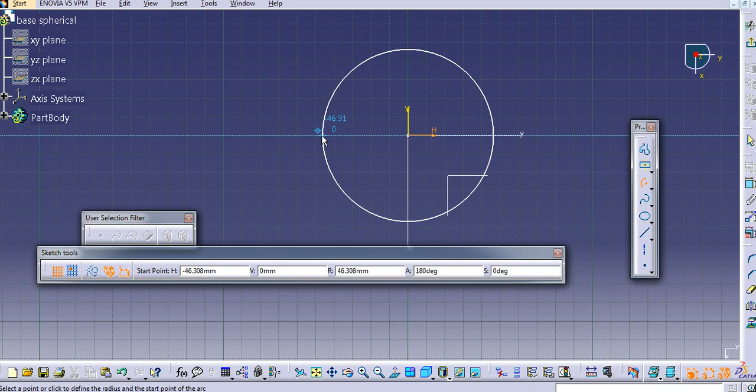For the sphere, we will create an arc here. Select a center point, then select this point and this point. We give the dimension for this, let's say it is 100 mm.

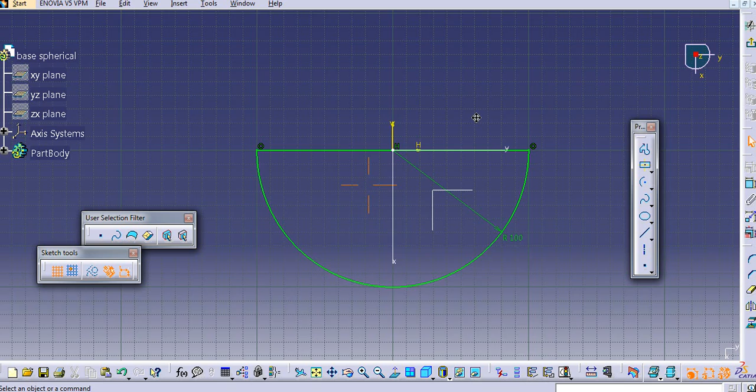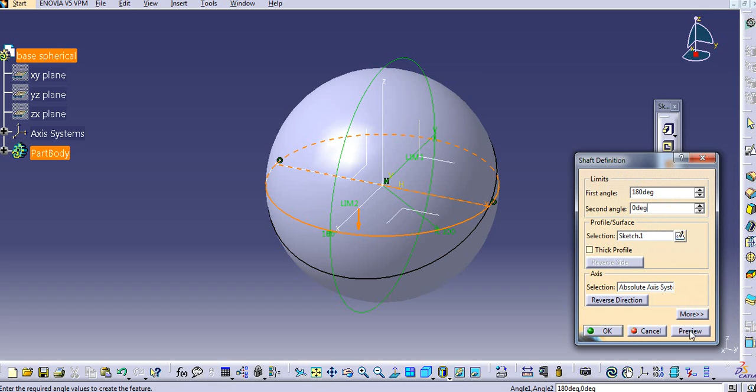Just create this line. Now we exit this and select the shaft command, select the profile and select the axis. I will select this axis for revolution and click preview. Now I'm getting this whole sphere here. I will provide 180 degrees for this, see the preview, and click OK.

So I want a half sphere here, a hemisphere. Again I will add a circular, that is a spherical pocket here, so I need to groove this.

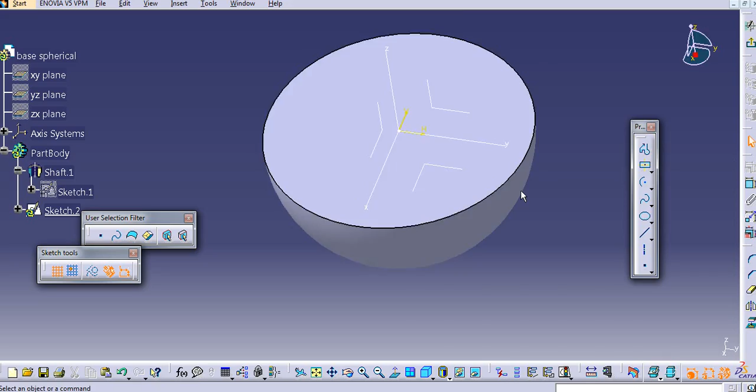I will sketch on this top face and again create an arc here. Select this edge and then select this edge, and provide a radius here.

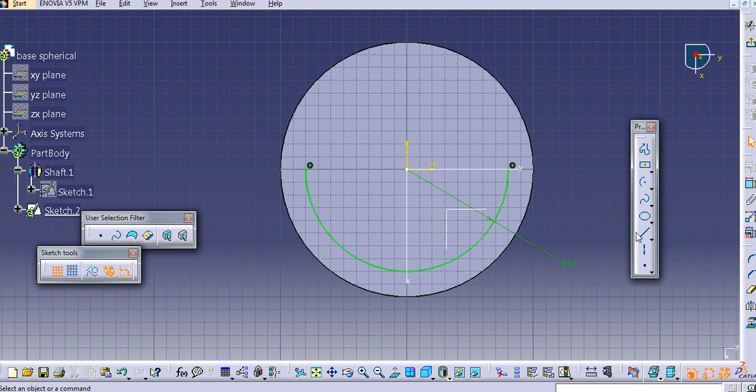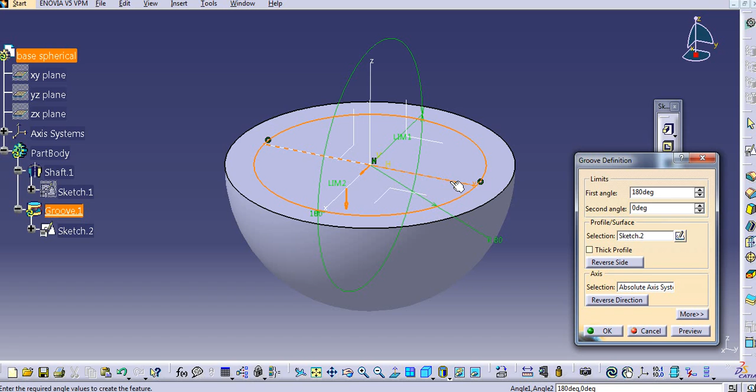Let's say it is 80 mm. Again create a line. Now exit the workbench and select the groove here. Again select the profile and select the axis, select this axis, and then click OK.

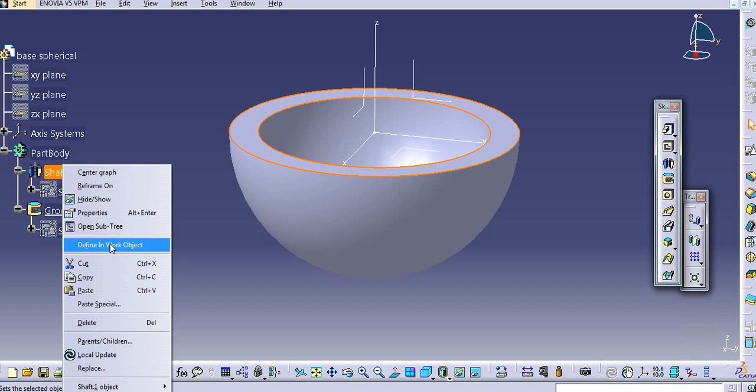So now our part is ready. I will add some other feature here. Before adding this groove, I will add a feature. Just right click on this shaft, define in work object, and add one more feature on this face.

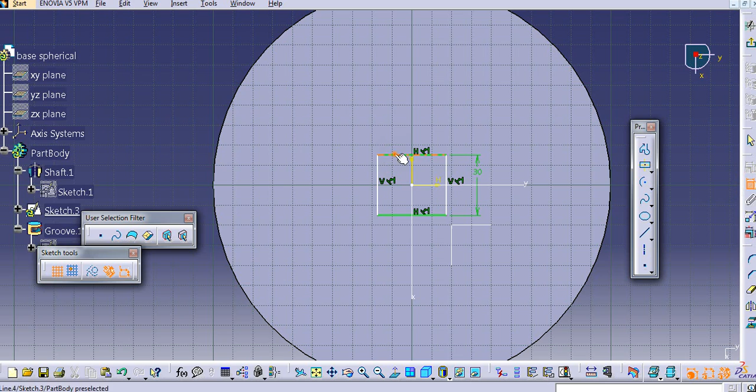So just add a rectangular feature. Let's say it is 30 mm. Just give a distance here, let's say again it is 30 mm.

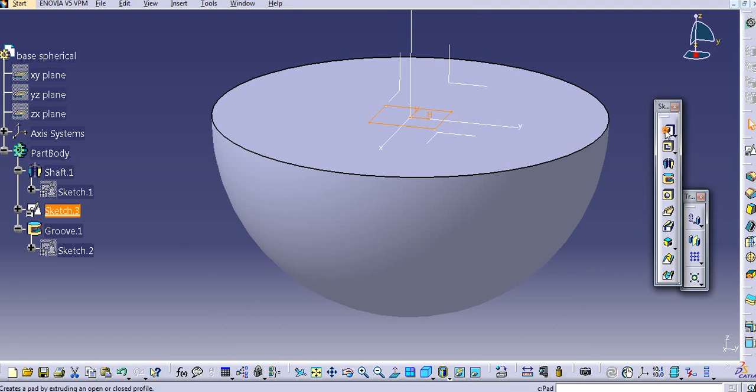Now exit the workbench, and I will add material in the reverse direction, add an approximate distance here, and then click OK. Now I will select the other, Define In Work Object, and in this way our part 1, the base spherical, is created. Now I will save this.

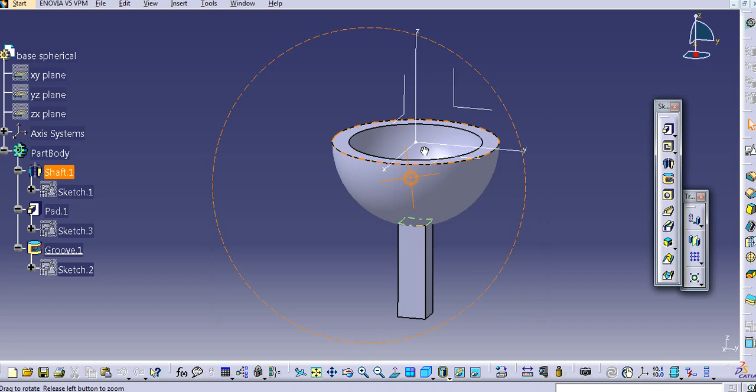I will create one more folder here, that is spherical joint, and then save this part. Now we will create another part here, starting again with part design.

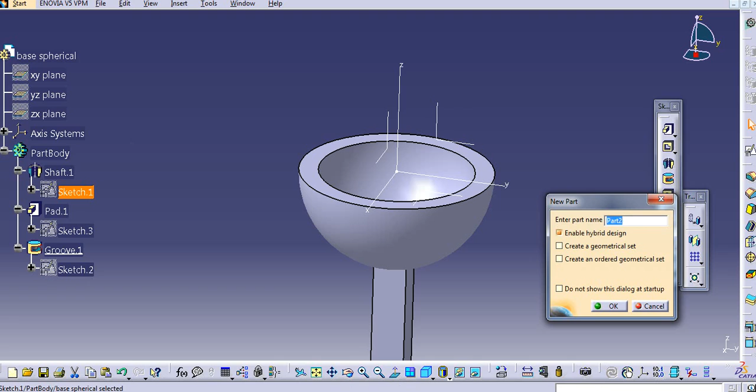Now we will create the upper part. Let's name it top spherical, and click OK. Now we will again create a profile, that is a circular profile. Select this center, select this edge, select this edge.

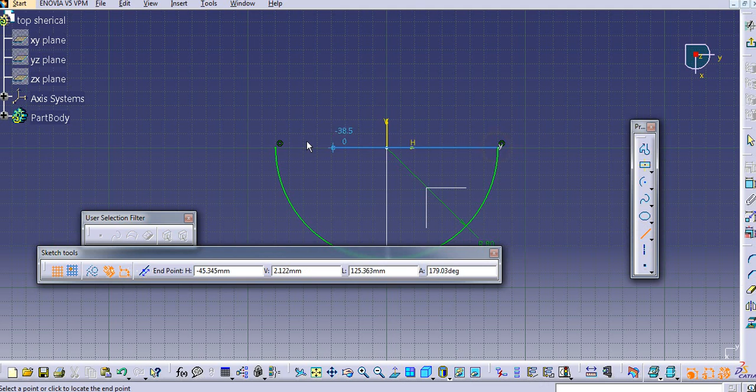Again I will give the dimension to it, let's say I will provide 80 mm now, and select the line command. Just add a line here, and then exit it. Again with the shaft command, select this profile, select the axis, and then click OK.

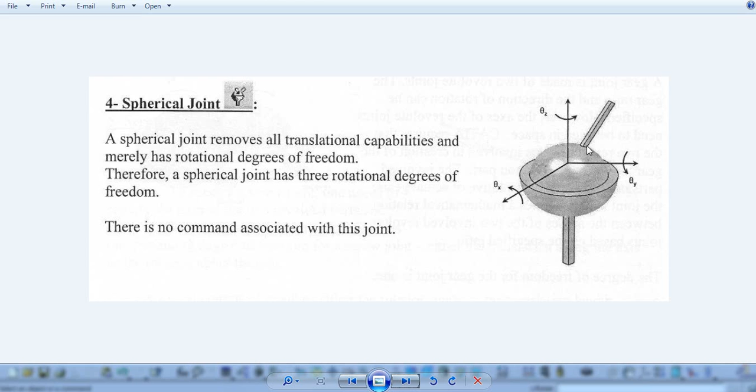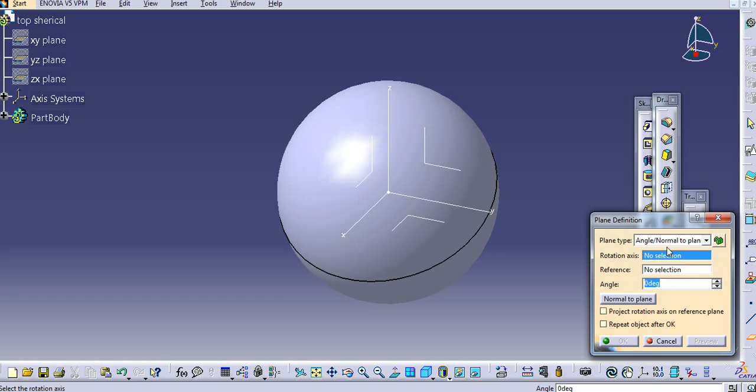Now we'll create a total sphere. Now I will add one more feature here. Let's take a reference plane. Just select this plane, and select angle/normal to plane.

Select the rotation axis. I will select this rotation axis and select this as reference, and... sorry, I wrongly selected that. Again select angle normal to plane. Now select a rotation axis, this axis, and select this reference.

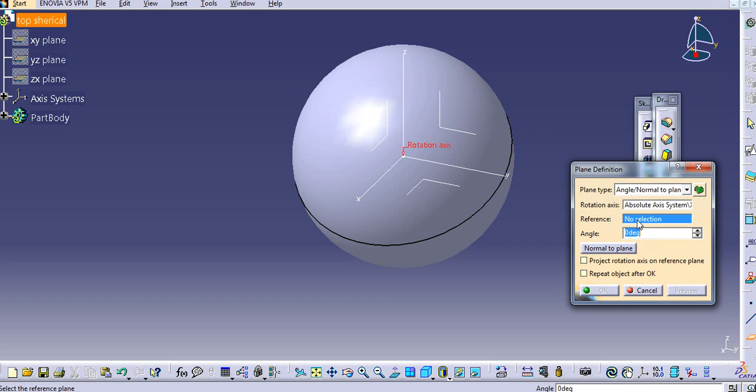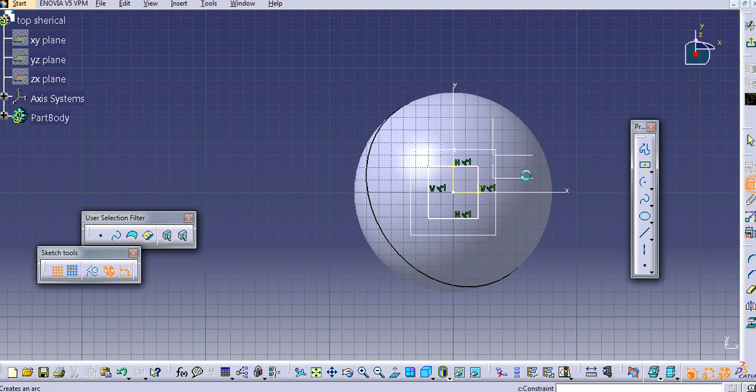Now I will again select this, select angle normal to plane, select this as a rotation axis, and select this reference. Now I will provide an angle to this. And now I will create one feature there, again a rectangle here. Just provide the dimensions, provide a length.

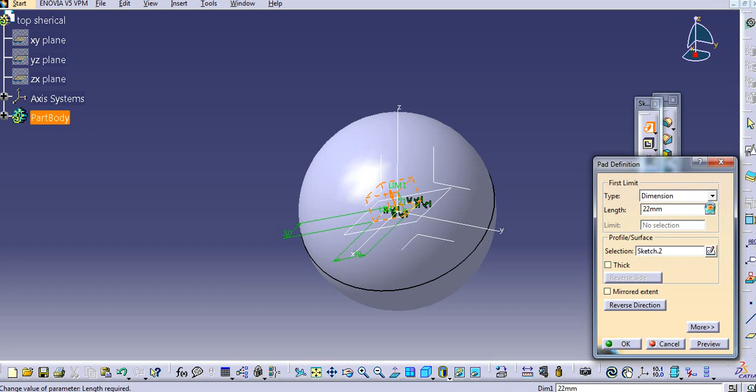And then exit the workbench. Now similarly again add material here, add an approximate, and then click OK. So now our second part is also completed. We will save this part.

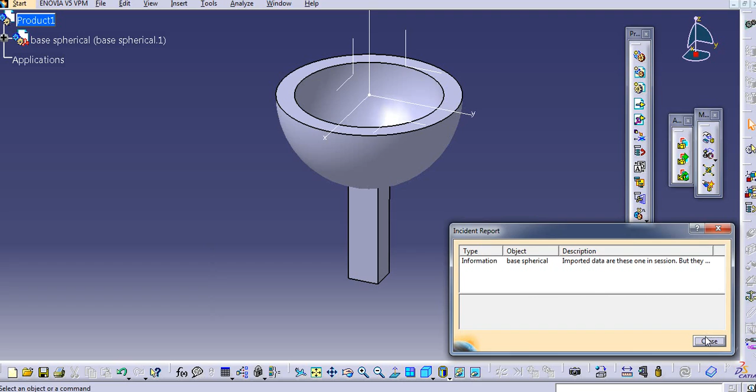Now we will create an assembly of these two parts. Just go to mechanical design and assembly design, then call the existing component, click on this product, select this base spherical and open it. Now I will first fix this part, click on this part. Again I will call another part, the top spherical, then click OK.

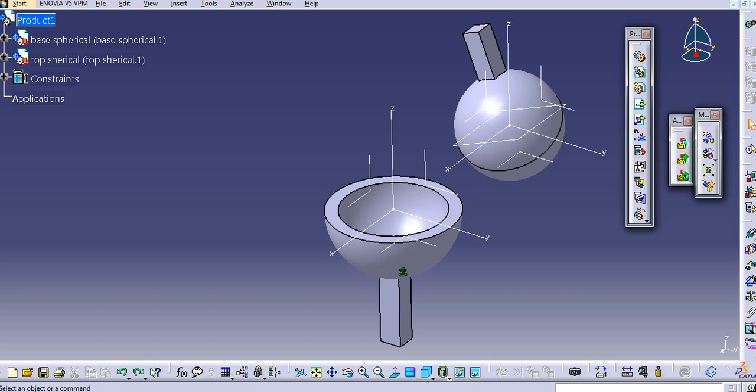Now I will first move this part and then click OK. Now I will directly create a contact constraint here. Just select this edge and select this edge, then click OK and update this. So this constraint is made here. Now we will see the mechanism, going to Digital Mockup and DMU Kinematics.

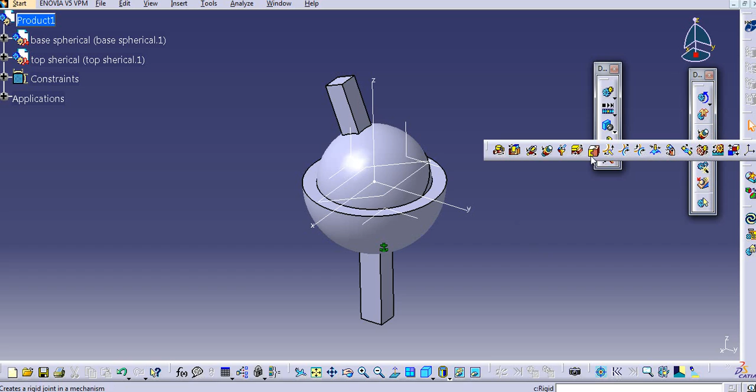Now again I will delete this constraint from the rigid assembly. Just select the fix, create a new mechanism, click OK and then select a fixed part here. So I will fix this part. Now select the spherical joint here.

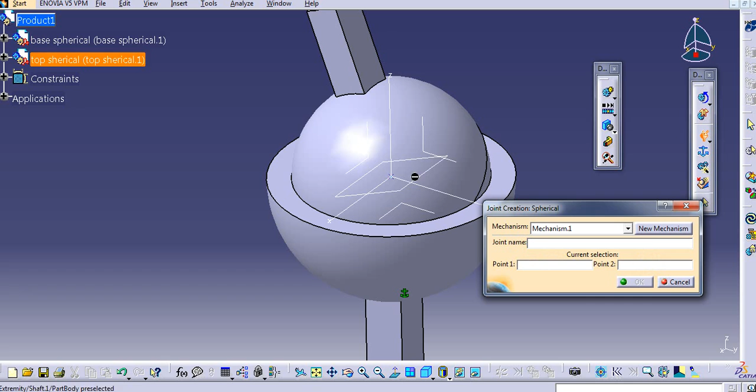Now you need point 1 and point 2, you have to select here. So here you need to select the sphere joint, that is sphere 1 and sphere 2, the points from this center of the sphere and this sphere you have to select. So again you need to create those points here.

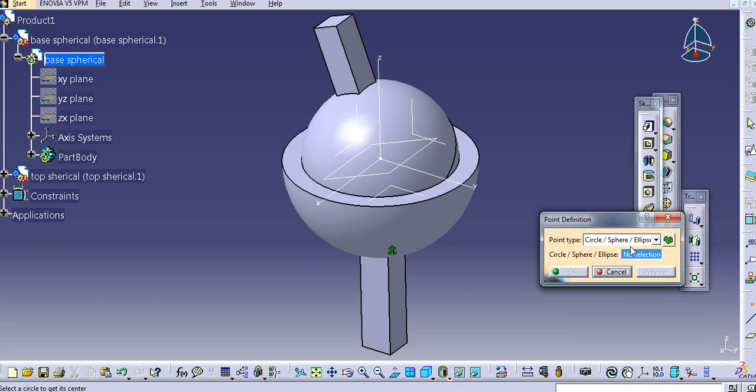So I will directly go to the part. Just I will double click that part. So in the base spherical, just create a point here. So again select the circle sphere, that is center you will get here. Just select the sphere. So select the sphere and then click OK. So you will get this point as the center of it.

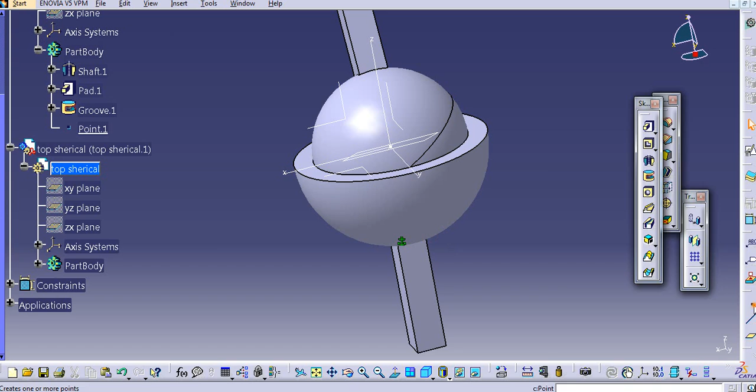So again similarly double click on this top spherical part, and now again select a point, again select a circle sphere and then select the sphere and then click OK. So again you can see that point in this.

Now again go to the product. Now select this joint, that is spherical joint, then select point 1, let's say select point 1 for the base, and then select point 2, and then click OK.

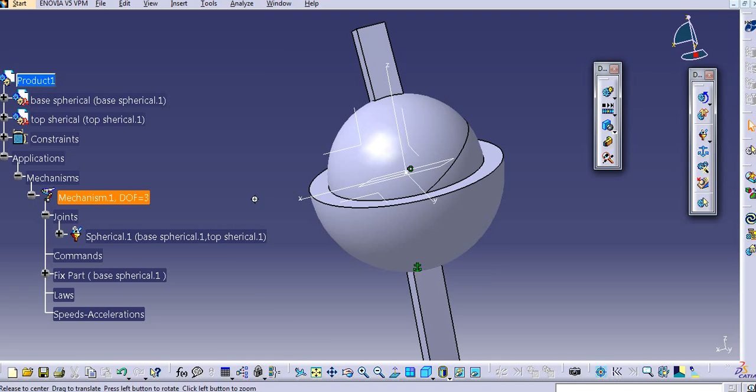Now I will again collapse this. You can see here the mechanism, and in that you can see the spherical joint created. But only with this mechanism, we cannot simulate that because we have not seen that message that your mechanism can be simulated. And also you can see from this mechanism that 3 degrees of freedom are still open there. So we need to constrain these degrees of freedom.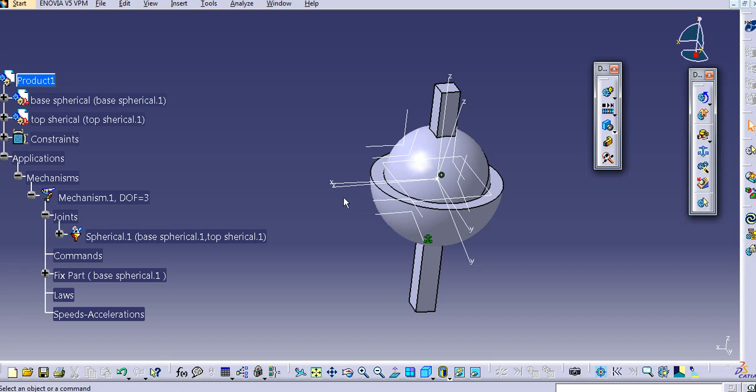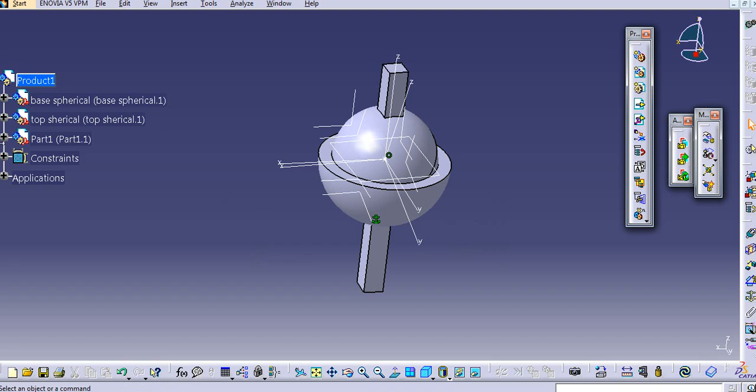So to constrain this, we need to insert another body here. So just go to, again I will go to the mechanical design and the assembly design, and here I will add a new part here. So insert a part and click on the product, and then again I will keep the same origin, and in this part just double click on this part and I will create simply a line here.

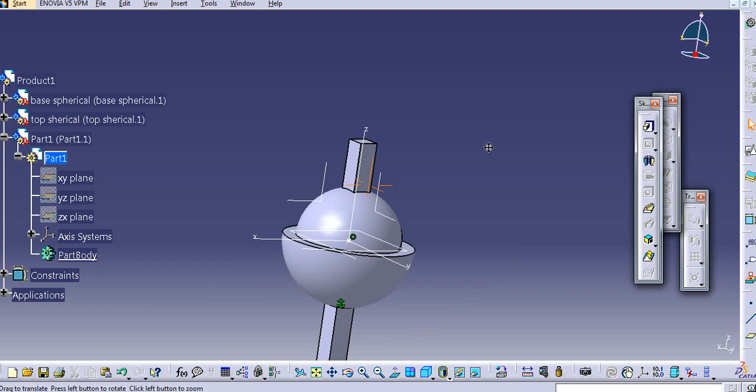So I will first hide this axis system here. So now I will directly create on this face here. Create simply a line here, and then exit this.

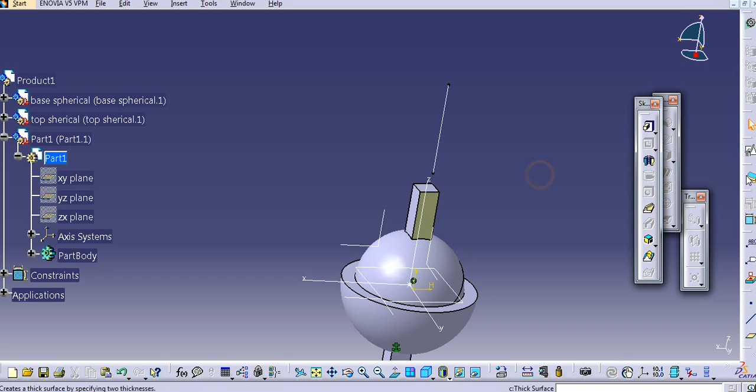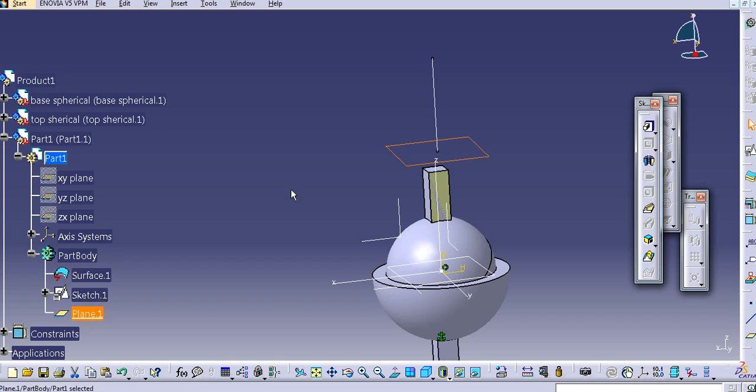And take a plane normal to this curve. Just select this curve and select this point here. Okay, so now this part only has this surface extracted, because we have selected this and this sketch and this plane. Okay, so now again we will go to.

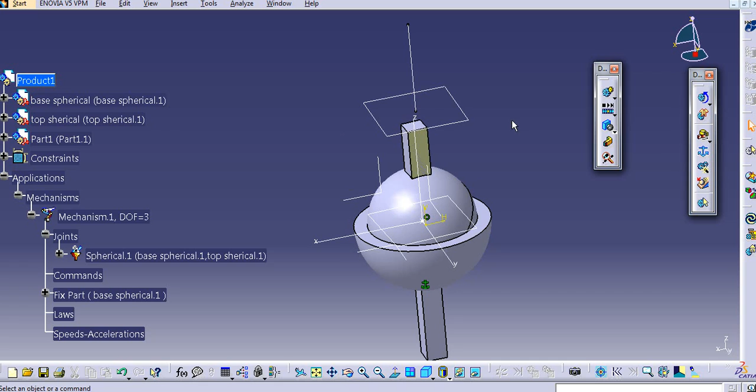Just double click on this product first and then go to digital mockup, enter DMU Kinematics. Now again you need to provide a revolute joint here, so just provide a revolute joint.

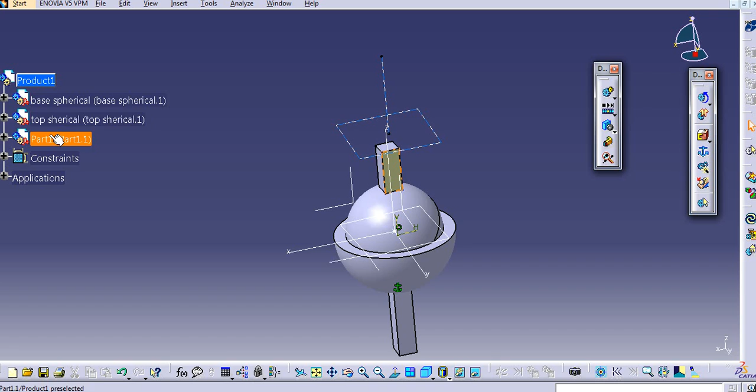I will, before going to do this, first change this part, because here I cannot select the axis here, so I will just edit this sketch. So I need to change this.

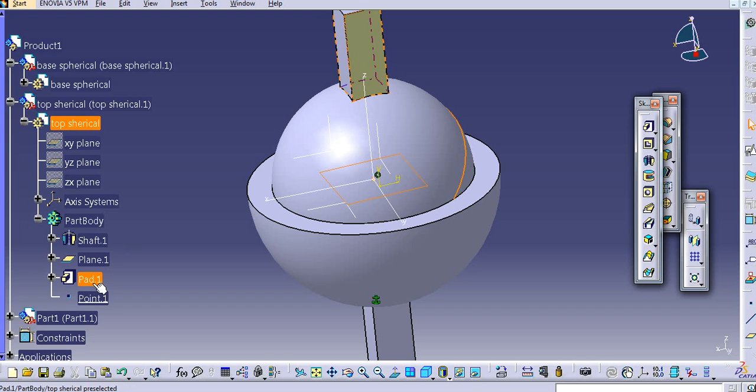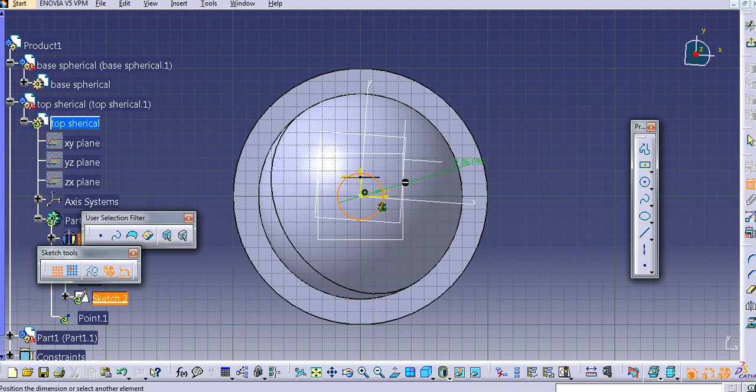I will keep this as it is. I just change this part here, and again I will go to this pad here, and I create here a circle. So just I will create a circle here and then exit this.

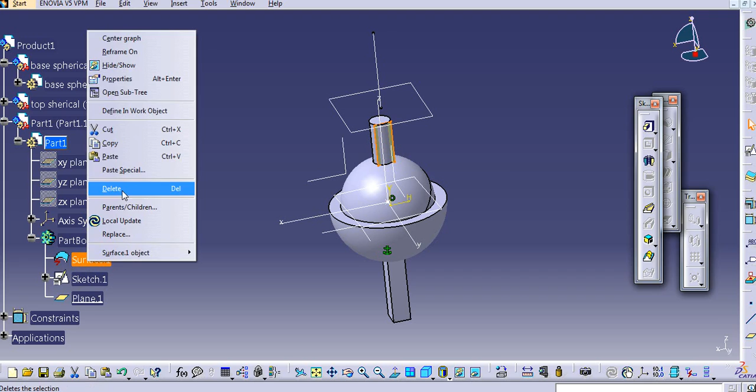Now I will delete this surface here, double click on this part, delete this also. Now I will create once again here, so go to this sketch.

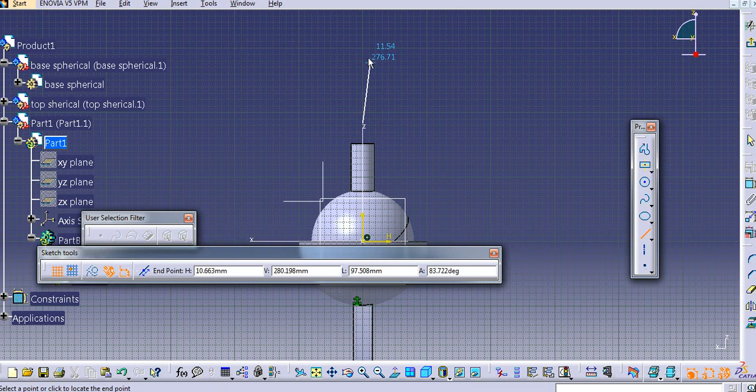And I will sketch on this plane here. Go to this, select this line. I will create a line here and create a plane here. Select normal to curve and then select this point and then click OK. Now our geometry is correct now.

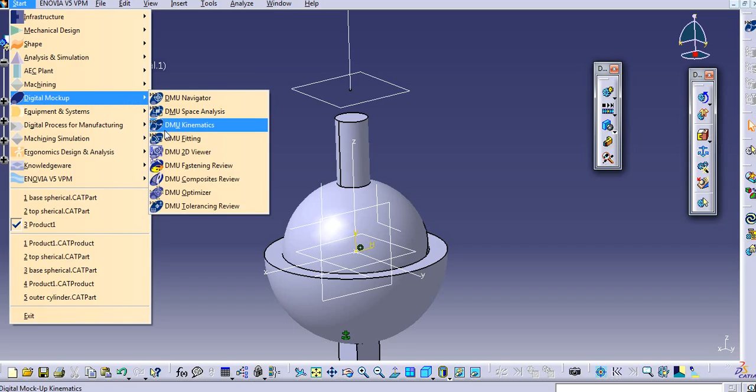So again go to product, go to digital mockup, DMU Kinematics. We are already in that. Okay, now we will provide a revolute joint here.

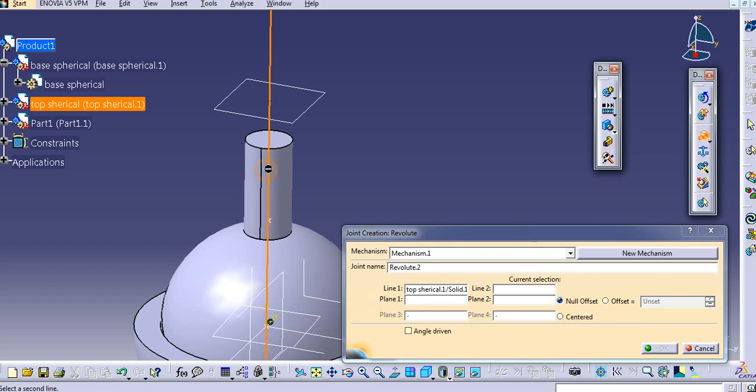So just select the line, that is we need to constrain, that is we need to reduce the degree of freedom of this part. Just select this line 1, the axis of this cylinder, and then select the axis of this, and then select the plane, that is we will select this plane and then select this plane and then provide an angle driven and then click OK. So now again you can see there are 3 degrees of freedom remaining.

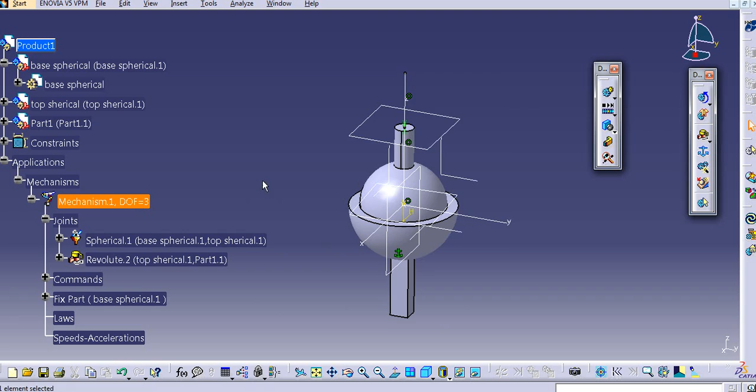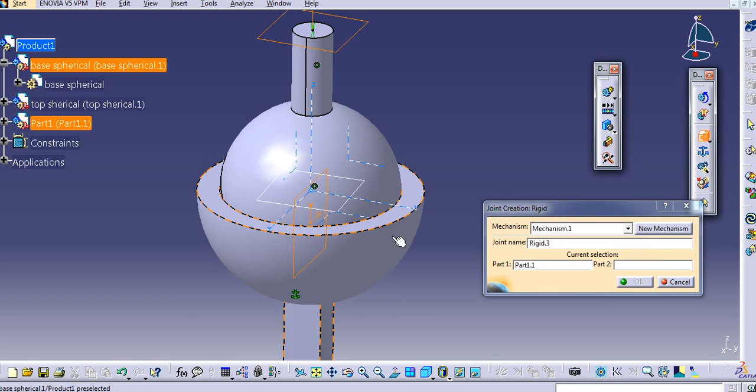Now we will create another joint here. We will make a rigid joint of this part and this part. Just select this part and select this part and then click OK. Now you can simulate this mechanism, and now you can see that the degree of freedom for this are 0.

So in this way, for the spherical mechanism, spherical joint, we need to use the other joints like the revolute joint and the rigid joint. So now you can create a simulation from this.

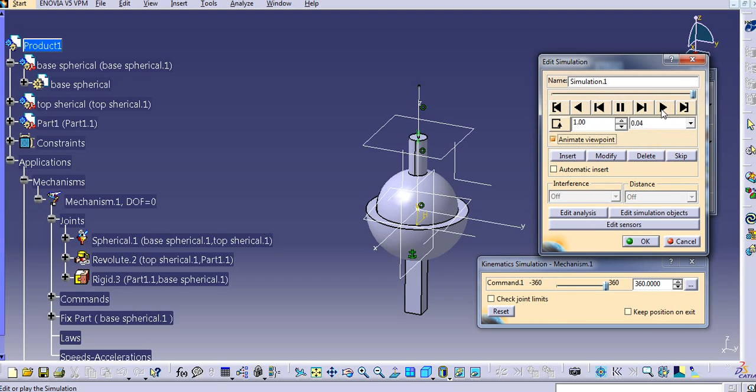Just simulate, select the mechanism, and now you can rotate this, then insert. So again jump backward and then again change these interpolation steps, and then you can see the result here. So in this way you can create a mechanism for this spherical joint.

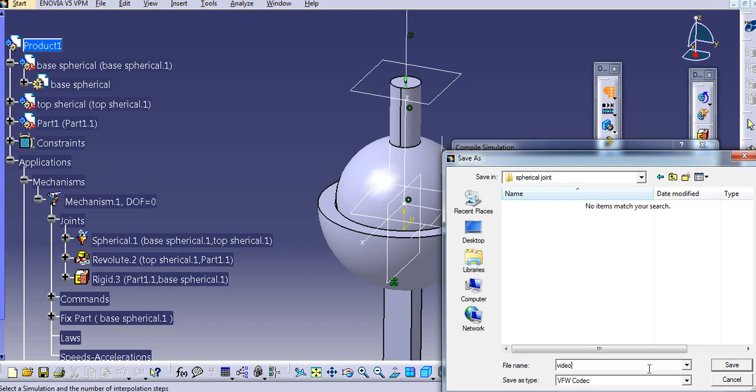Again, if you want to save this with a compile simulation, you can generate an animation file here. So again, give a file name here, spherical joint, create a file, and then again select a time step, and then you can create that video file for this spherical joint.

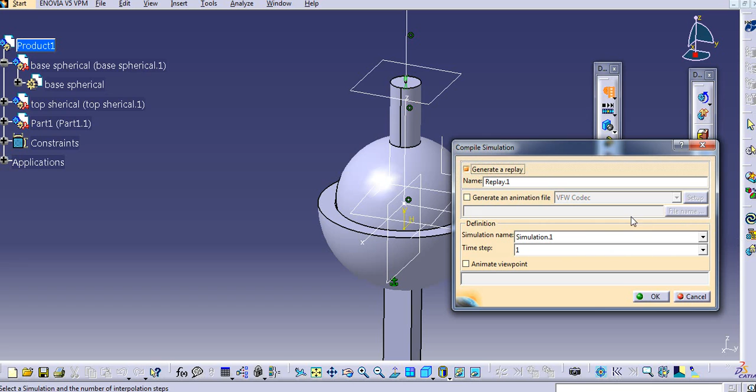Similarly, to save this video file in this tree, just select this generate replay, and then again select the time steps, and then click on OK. So it will be saved in this tree as in the replay. So you can play this later from this replay option in the tree.